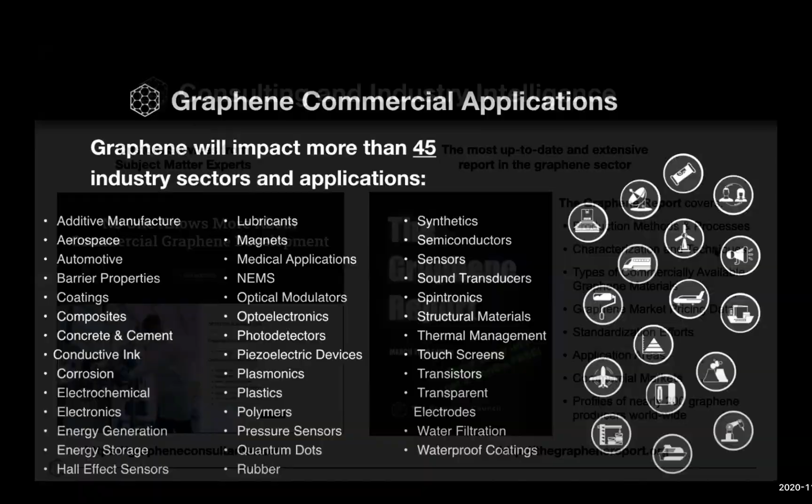One of the reasons graphene is such an exciting material is that it has so many potential applications, and we've identified more than 45 different ways that graphene can be used to dramatically improve the performance of other materials or applications. The Graphene Council is not only a trade and professional body, but we can also provide custom consulting and advisory services.

We are also the authors of the Graphene Report, a more than 600-page document that outlines production methods and processes, characterization techniques, forms of commercially available graphene materials, market pricing data, standardization information, different applications and commercial markets. We also profile more than 200 graphene producers worldwide.

The Graphene Council is the largest body for this sector, and we are a Tier 2 member of the Graphene Engineering and Innovation Center at the University of Manchester. We are incorporated in the UK, in the United States, in Switzerland, and have an office in Brazil with the MackGraphe Institute at Mackenzie University in Sao Paulo.

This is just one of a series of webinars that we are providing to help educate end users in particular about how to unleash the potential for graphene materials. We've also developed white papers on graphene use in aerospace and automotive applications as platforms.

We also have a collaborative project testing 15 different forms of graphene material head-to-head in a standard resin system to really evaluate how graphene can improve important mechanical properties and see which form of graphene, because there are many different types or morphologies of this nanomaterial, performs best in a resin system. They have independent third-party testing data that will be made available to the public, and that testing program is done in conjunction with the University of Manchester.

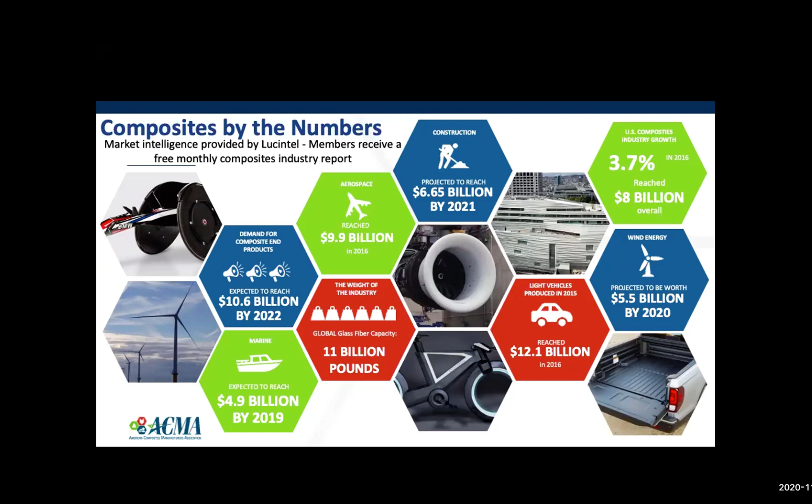I think I've already covered this, so I'm going to move on to some market development activities related to our Technology Day programs and OEM roundtables, where we connect our members to the latest and greatest needs within the end user community regarding composites.

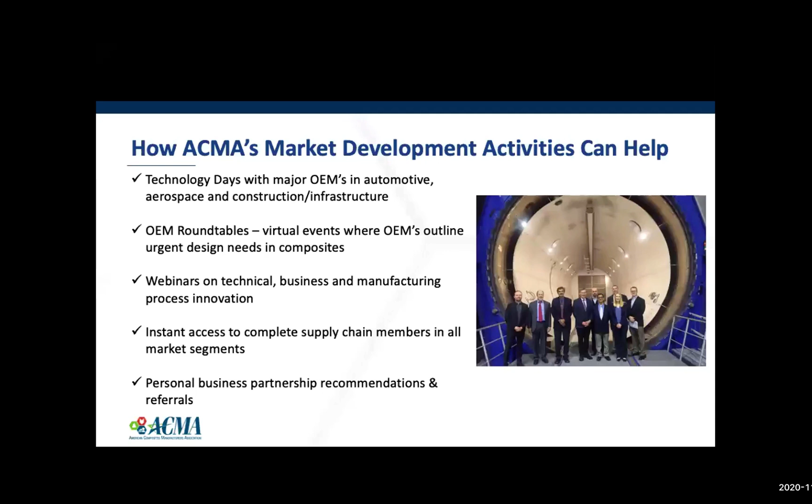And we have divisions in all the various market segments. As I said before, we represent everything from aerospace, architectural, through infrastructure, construction, even advanced air mobility, automotive, and high performance, which takes in aerospace, defense, wind, and compressed gases.

So our Technology Day programs, I'll just touch on this quickly, are private member-only events where we speak with one voice as an industry and help educate and bring the message of composites to the end users that are out there, many of whom did not get training in composites in their primary education. So we see education as one of our primary duties at ACMA.

And just sort of leaving you with some events you won't want to miss. You just missed our Spirit Aerosystems Tech Day, where we had 190 thought leaders from Spirit Aerosystems from around the world. Our VW Group Tech Days, I think there are still a few slots left. We'll be going from January to April in weekly meetings with folks from around Volkswagen Group.

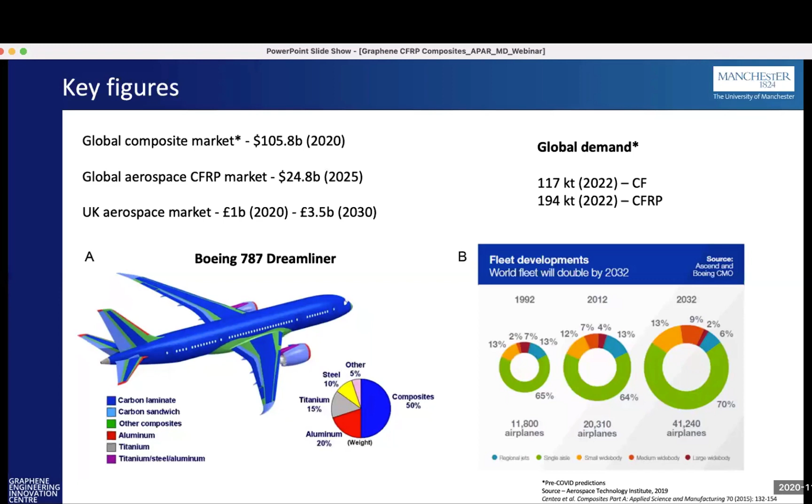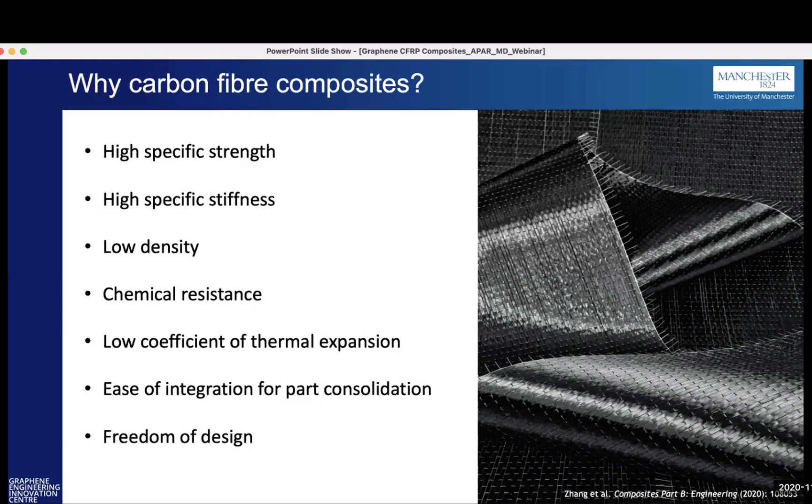So why carbon fiber composites? It lends itself to easy design, makes life easy for designing aircraft parts - high specific strength, high specific stiffness, low density, chemical resistance, low coefficient of expansion, ease of integration, part consolidation, and freedom of design. All of this lends itself to aerospace, automotive, and marine industries, making parts easier to design, more flexible, and lighter. Today, the push to reduce the amount of fuel used in aircraft and other industries is massive. So lightweighting of aircraft, cars, and marine vessels has been pushed heavily just to reduce fuel use.

Adding graphene to that - what makes graphene special? Graphene is 1/1,000,000th of the thickness of a human hair, but as a single layer it is the highest thermally conductive material known to man, and the highest electroconductive material known. It's chemically modifiable, so we can adapt it to whatever we want, whether that's chemical resistance or enhancing resin systems when put into carbon fiber prepreg. You can add it to resin systems a lot easier, with functionalization. It has high tensile strength - as a single layer it's 200 times stronger than steel. It has high surface area and is flexible, so we can make flexible components such as flexible batteries and screens. So it doesn't just lend itself to one new component - it's multifunctional, bringing that multifunctionality to a new component.

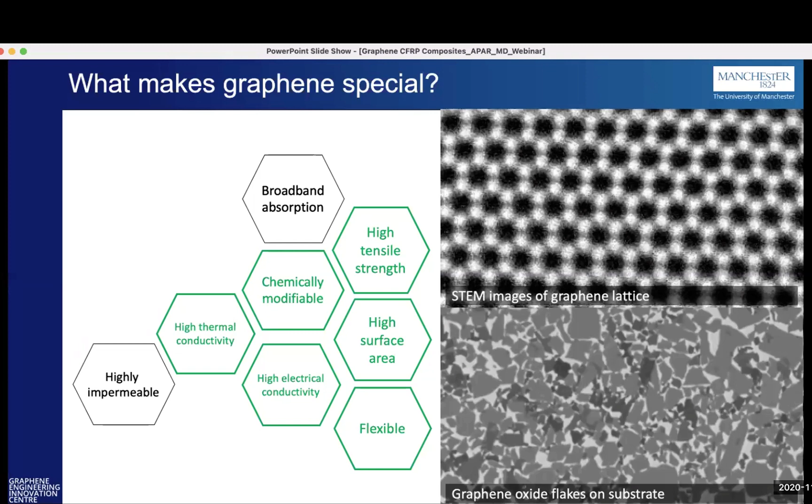So, existing and developmental commercial graphene carbon fiber reinforced plastic applications - some that we know of so far. The BAC car is a single-seat road car designed and built in Liverpool in the UK. These guys have developed a graphene-enhanced carbon fiber car which is actually in the market - I know for a fact they've sold all those cars to date. But they didn't just design new parts for the car; they actually started by designing new tooling to make the actual components, using graphene-enhanced prepregs for the tooling.

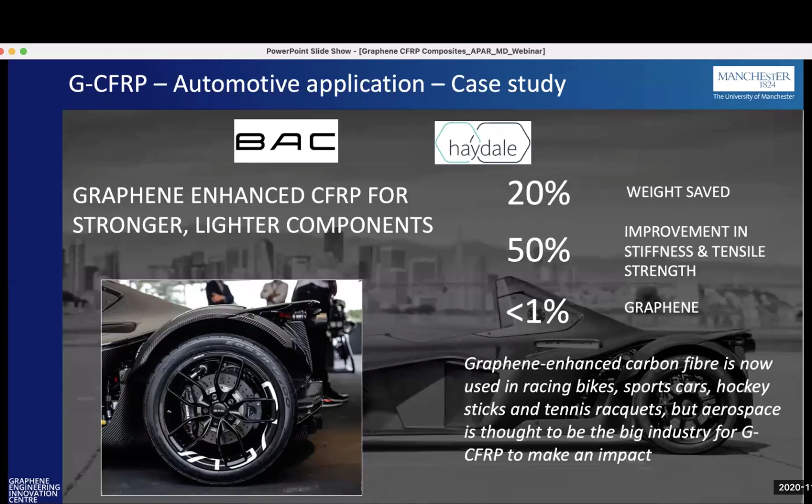This improved the thermal conductivity of the tooling, so they could process it quicker - it would heat up in the autoclave quicker, cool down quicker, and they could take parts out sooner, decreasing the actual process time required for manufacturing the car. They also designed new components - a component prepreg using less than 1% graphene in its resin system. The improvements for stiffness and tensile strength increased by approximately 50%, which allowed them to use less material in their parts, saving around 20% in total car weight. Considering the car itself only weighed 600 kilos to start with, that's quite a saving, and it also enables customers to drive around a track a lot quicker than normal.

For aerospace applications, one we've seen, which I'm sure most people have seen, is the Airbus A350 leading edge. This was part of the Wing of the Future project with Graphene Flagship, using a Hexflow RTM6 resin system with added graphene, put through an RTM process. They managed to increase the mechanical properties and also decrease the fracture speed of the component when in use. By increasing the mechanical properties, they were able to use less material, giving it a thinner edge. The actual component itself was a lot thinner, a lot lighter, and a better product altogether.

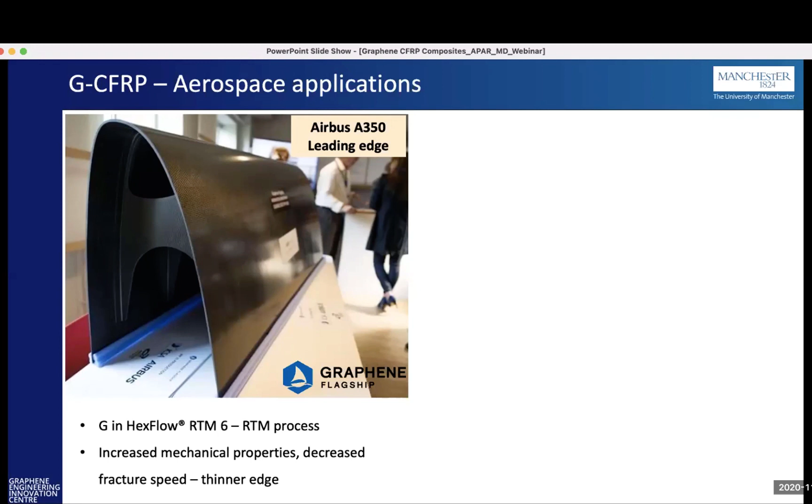So this is a UAV called Juno, which was developed by the University of Central Lancashire, along with Haydale and ourselves at Manchester University. As you can see, prepreg is used in the fuselage and the wings as well. If you look at the end of each wing, you'll see a blue sticker and a purple sticker - those are actually 3D printed plastic parts, the winglets, which are then bonded onto the carbon fiber wings themselves.

So it's covered multiple areas of where we can add graphene to different composites. And the next generation for the Juno will have a graphene enhanced battery. We've yet to decide what it's going to power, but it will be added to the next generation.

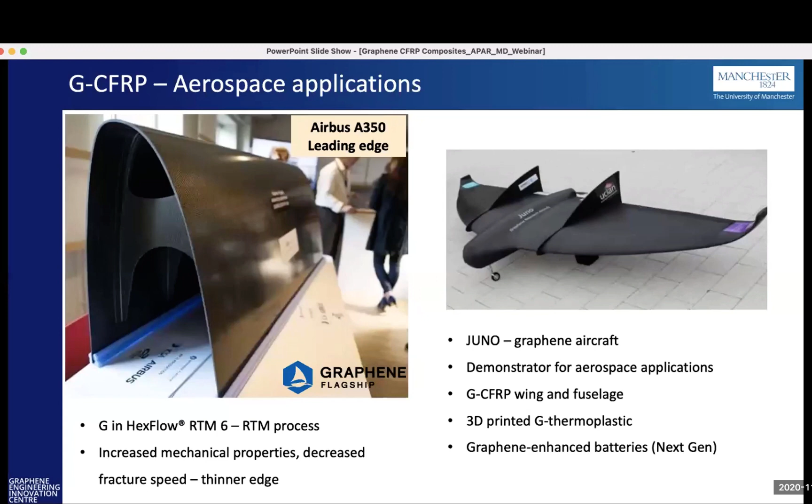So this is looking at thermal conductivity. Actually, this is an interesting one, for those in manufacturing of carbon fiber components. This, you can see, is a mandrel tool for a wing spar for an aircraft. It's 10 meters long. The customer had problems with microcracking in their tooling system, and tools were having to be replaced quite often. So it became very expensive for them to use carbon fiber tooling.

So what these guys did at Applied Graphene and Composite Tooling Engineering Solutions, Retrac and SHD, they developed a graphene enhanced prepreg, which was used just as a surface ply in areas where it was required. The graphene toughened the matrix, and that reduced the actual microcracking over repeated cycles, so it extended the tool's life cycle. In fact, I think that tool is still in service and hasn't had to be replaced as yet. So the costs have been driven down, and the customers using those tools now are very happy.

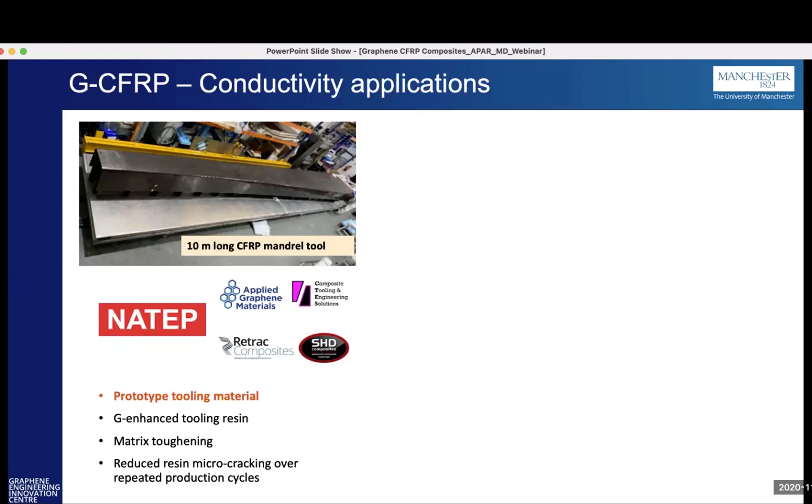So this is a lightning strike. Again, this is with a company called Haydale. So this was looking at trying to replace the copper wiring in the wings for lightning strike in aircraft - to increase electrical conductivity, a carbon fiber reinforced plastic with a graphene enhanced epoxy.

You can see on the left without the graphene, there are scorch marks, and with the graphene, there are no scorch marks whatsoever from the testing, so it didn't really touch it. But also, like I mentioned earlier about multifunctionality, they actually managed to increase the modulus in the material as well - by 16 to 20%.

And this material has actually been in an aircraft, a demonstrator, in 2017. So that was a very successful demonstration. And this material is now actually available in the market - you can actually buy this. It's commercially available.

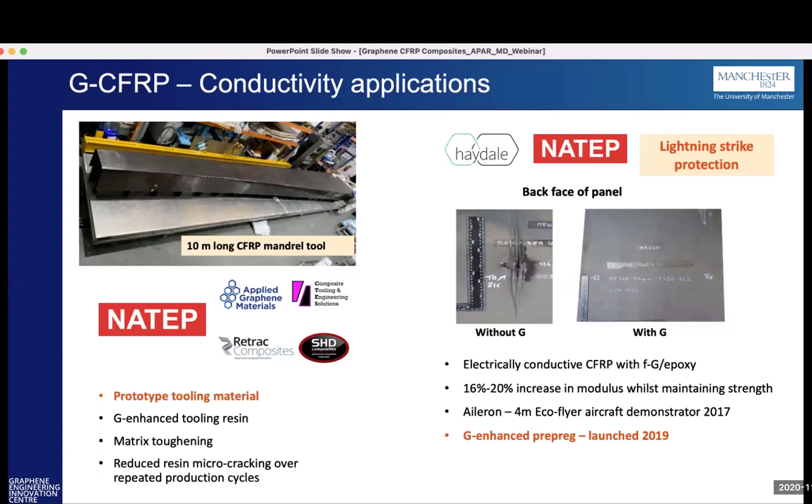So another area where graphene prepregs have been used is sporting goods. The gentleman, the athlete you see here, his name is Dom Parsons. He's a British Winter Olympian, and he won the bronze medal in the skeleton bob in 2018 on a graphene enhanced skeleton sled.

So what they found was that the improved toughness helped with the dampening of the vibrations from the actual run, through the runners into the athlete as well. So not only in toughness, but the dampening enabled Dom to be more comfortable on the sled. It stopped vibrations, so he could then control it better, and manage it a lot better.

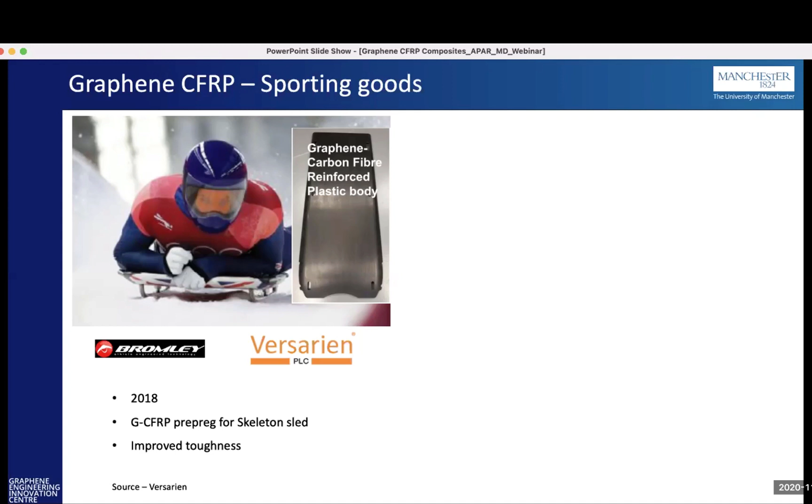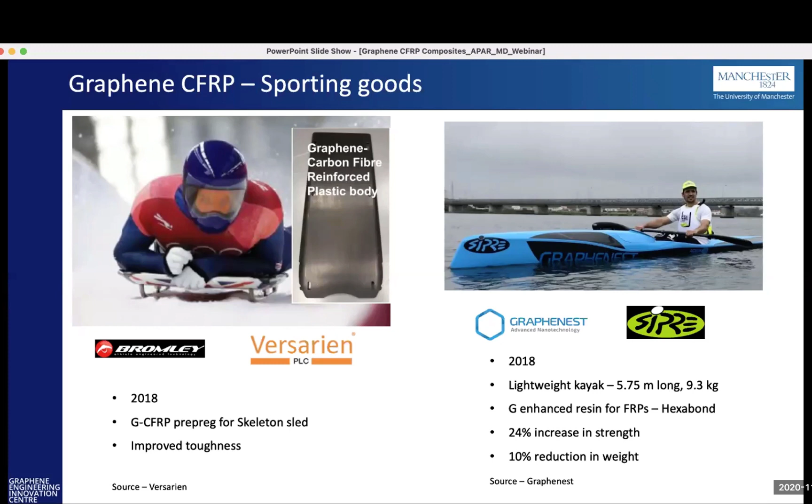So this, at the time we got this, was said to be the lightest kayak of its class in the world. I don't know how true that is anymore - I'd say it's back in 2018. But what these guys did, they added graphene to a resin system called Hexabond, and made a prepreg material with that. They found a 24% increase in strength, which enabled them to reduce the amount of material used, saving a total of 10% reduction in weight. Over something that size, a 10% reduction in weight is quite significant. So it's a really good test of graphene there.

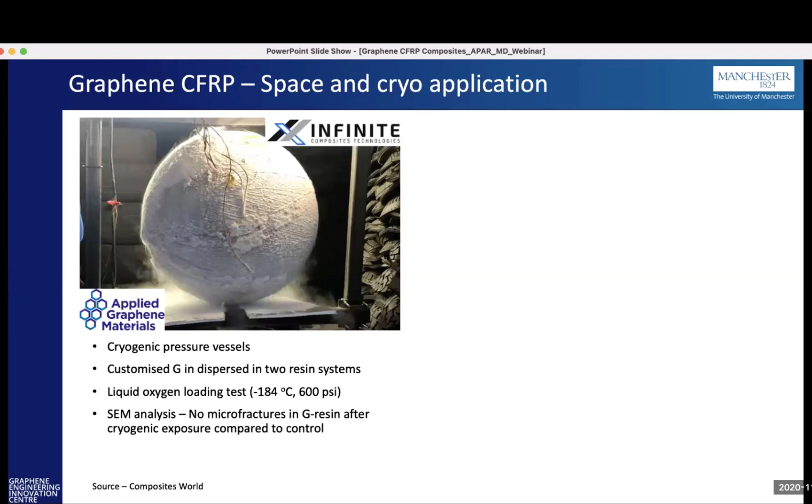So Orbex is a UK-based low-cost orbital launch service. These guys put commercial satellites into space for their customers.

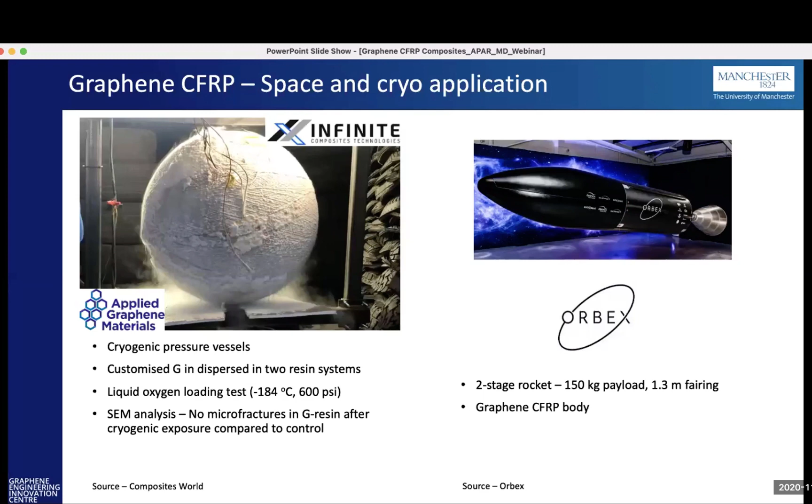They are looking at adding graphene to their carbon fiber body so they can reduce the weight. Hopefully when they reduce the weight of the actual rocket itself, they can then increase the amount of payload they can take up into space, or they can reduce the amount of fuel they require if they're keeping the weight the same. They can reduce the amount of fuel they're having to use to launch these rockets.

A couple of other products and developments which are out there in the market - I'm not sure people are aware of these - there's Dassi bikes, which was claimed to be the lightest bike on the market when it first came out. I'm not sure if you can still buy these bikes or not. Fishing rods.

Fishing rods are massive in the US. I know there's a company called G Rods in the US which have a number of fishing rods with graphene in their materials.

Bumpers for the automotive industry - this is a structural part for a bumper, and this was developed at the University of Sunderland, again under part of the graphene flagship. So that part is now going to the next stage and hopefully getting into industry.

We also have graphene enhanced prepregs. There's a number of different prepregs now which are available on the market. It's not only our partners that are selling those, but there are several materials out there available for people to buy off the shelf and use in their products.

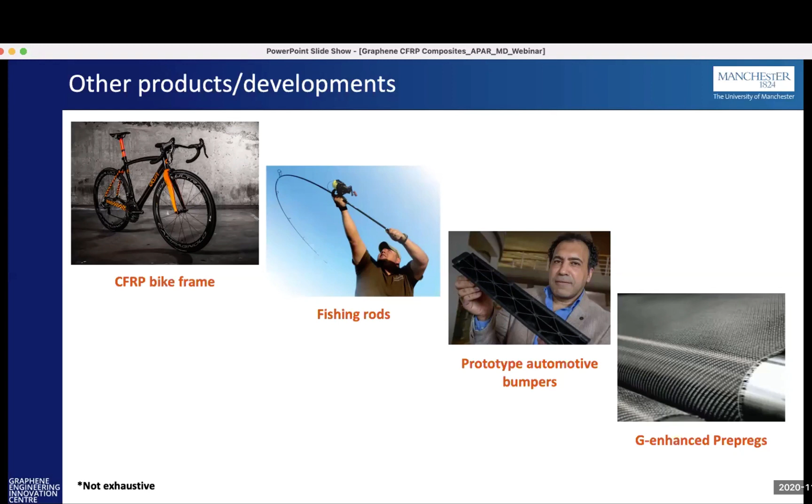That's a quick overview of where we're at with graphene and carbon fiber. I'm going to hand you over to my colleague, Dr. Aaron Raju, so he's going to go through the challenges in graphene adaptation.

Thanks, Terence. Firstly, I'd like to thank Terence for giving us the opportunity to be presenting in this forum. It's a great forum. So I'll start off with the challenges in graphene adaptation.

So the first one being, what are the common challenges existing in fiber reinforced plastics? The fiber and the matrix themselves are two different materials with completely dissimilar physical and interfacial properties. Because of these differences, they typically have a weak interface, and any defects present in the interfacial area can lead to sudden and catastrophic failures. Also, because of this property difference, these two materials have completely different thermal expansion coefficients, which could cause accelerated degradation.

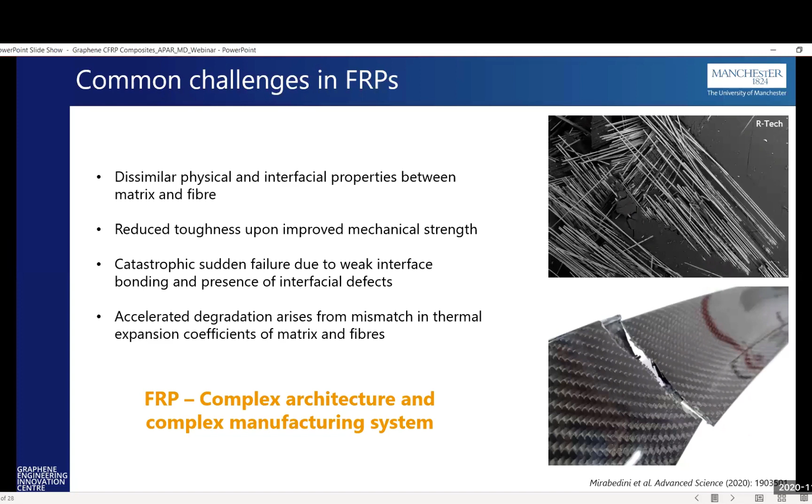So it's fair to say that the FRP is a complex architecture in itself, and the production methods to produce these composites are quite complex because of the parameters that are actually being considered.

So what are the commercial challenges when it comes to graphene? Firstly, the raw material itself - there are several different types of graphene, and compared to 10 years ago, there's a lot more graphene that you can actually count. There are several webinars happening within Graphene Council explaining the different types of graphene as well. So you have to choose the right type of graphene for the right application, and that's the most crucial part when it comes to designing any graphene for your application.

For example, graphene oxide is hydrophilic, so you could use it for water absorption, whereas graphene nanoplatelets are hydrophobic, so you'd use them for electrical conductivity and similar applications.

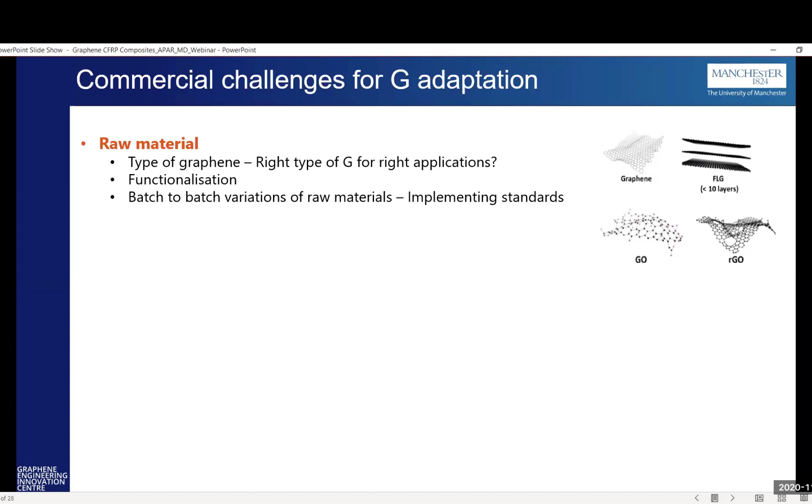When it comes to the actual raw material production, there is a lot of batch-to-batch variation, and the regulatory bodies are currently implementing standards to address that particular problem. It's fair to say that in recent years, raw material manufacturers themselves are putting in quite stringent quality regulations within the production of their materials, so we're not seeing as much batch-to-batch variation compared to several years before.

Of course, the second challenge is dispersion - how well the graphene is actually dispersed in the matrix form, and what are the best dispersion techniques to use. For example, do you have to use a high shear method or a low shear method, or do you have to implement any post-processing techniques in order to achieve dispersion in the final product.

Some may ask whether the resin transfer molding procedure could have a filtration problem, and there are techniques currently implemented to avoid this filtration of graphene nanoparticles. When it comes to material design, one of the data points lacking for end and prospective customers is data around operation scenarios or severe loading conditions.

There are plenty of literature and academic studies that say graphene is viable for certain applications. But when it comes to operational scenarios under severe loadings, the data is quite limited on how open companies are willing to share with end customers, and that's always the challenge.

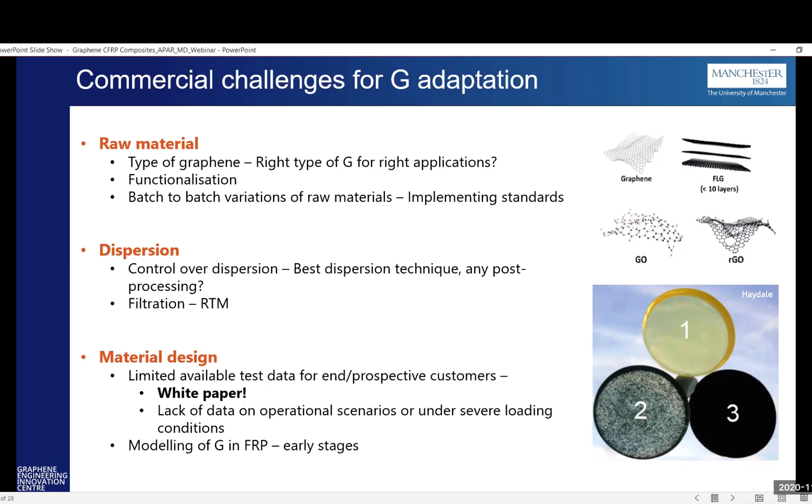Moving on to modeling. Typically, the modeling around graphene in fiber reinforced materials is still in the early stages. The research and development is going in the right direction in order to advance this particular field.

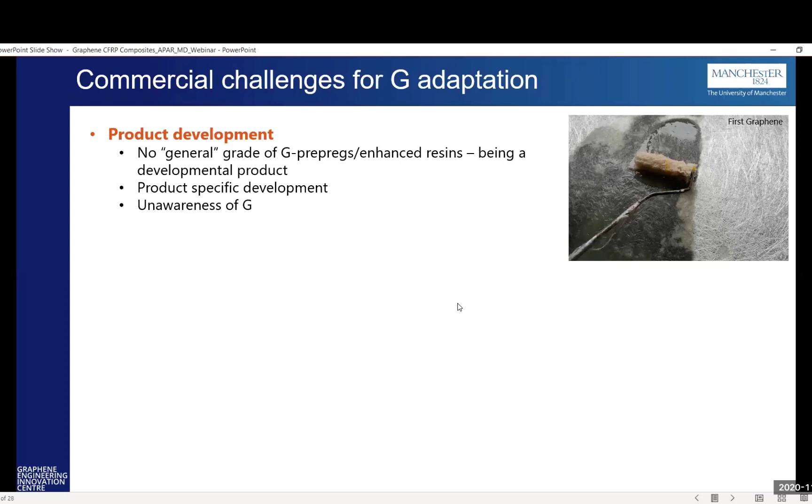The product development of graphene has always been specific for that particular application. So for people who don't have that sort of budget, it's hard for them to develop products without knowledge of graphene. Still, some companies or people are unaware of the presence of graphene, or what it can actually apply or impart to their products.

Complex resin formulation - as you all know, none of the resins as produced are used typically. They are either formulated with toughening materials or other fillers as well. So there is an interfacial interaction between graphene and these other fillers, which has to be considered when designing the material. This is one of the challenges of adapting graphene in commercial applications.

Putting cost in - for some people, cost is still a factor. To be honest, back in 2011 I bought 1 gram of graphene for 500 pounds, whereas now you can buy a decent grade of graphene for a kilogram under $200. Typically the loadings of graphene you want to add into fiber reinforced polymers are less than 1%, typically 0.5% in the resin, so you can go a long way.

Health and safety of the materials - how it can be handled, how it should be handled safely - is another issue.

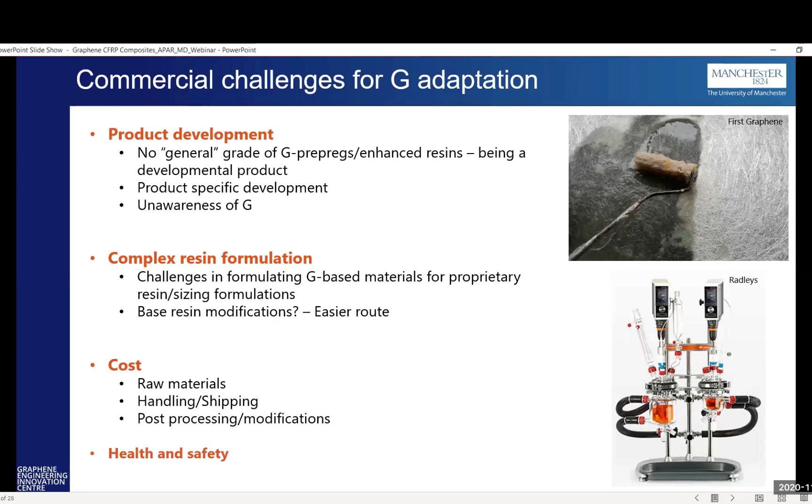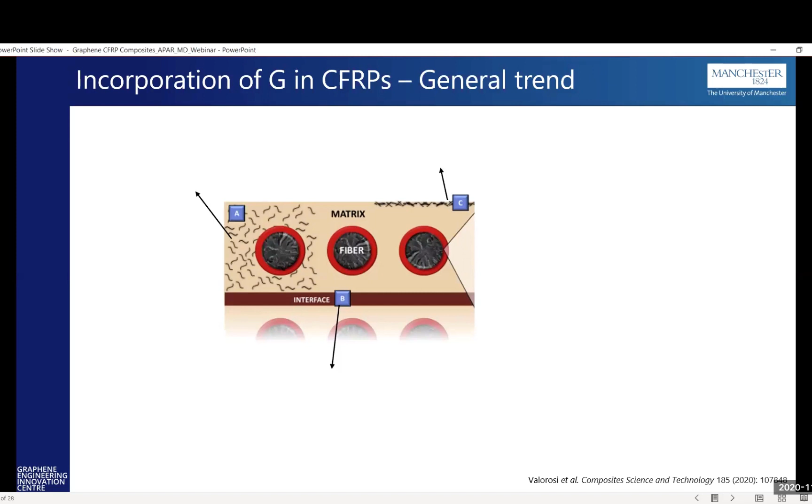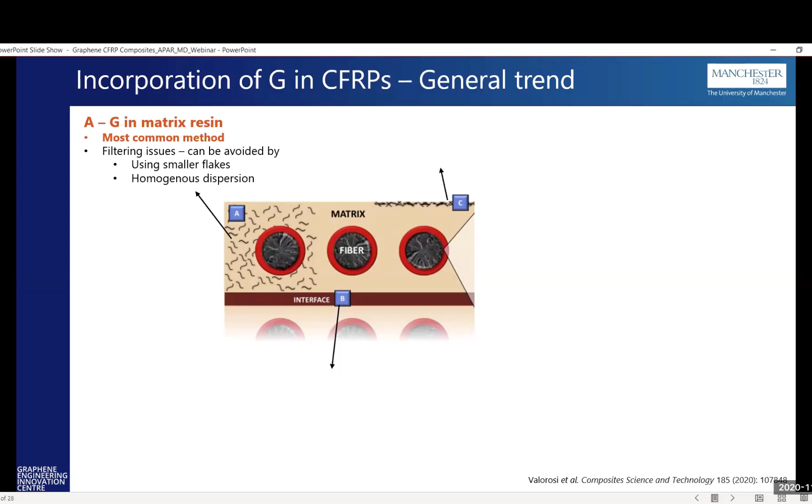So what are the opportunities of graphene carbon reinforced plastics? Just as a general trend, how is graphene added into CFRPs? The first one, of course, is modifying the bulk matrix, by adding graphene into the resin system itself. That's one of the most easiest ways. One of the challenges then is how do we actually keep it homogeneously dispersed.

The second method is by adding the graphene epoxy onto a film in between the plies, for example. Either you could apply graphene as a resin film, or it can be spray coated in between the dry fabric or on the pre-preg themselves, so that in the cured laminate, the graphene actually lies at the interface between two different plies.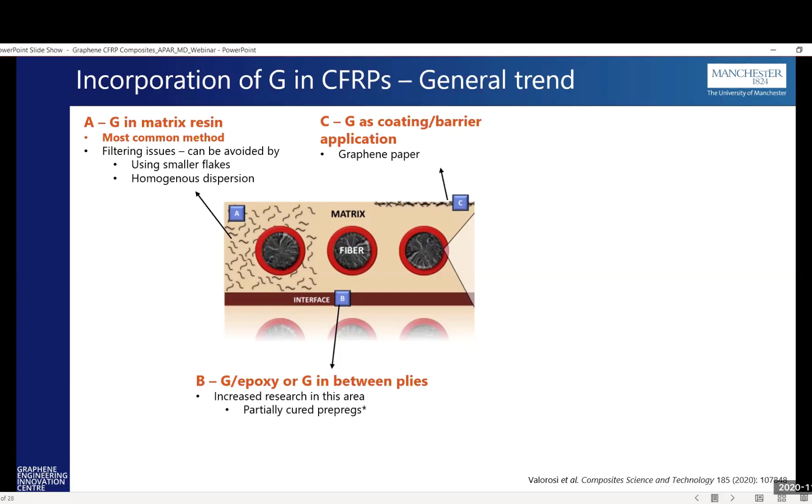The third method is graphene coated on top of the laminate directly, so it could act as a barrier application. Or the other method is to modify the surface of the carbon fiber themselves, either by grafting graphene or graphene-based materials directly covalently to the carbon fibers, or by modifying the actual sizing material by adding graphene or graphene oxide-based materials to it - which can act as the interface between the carbon fiber and the matrix.

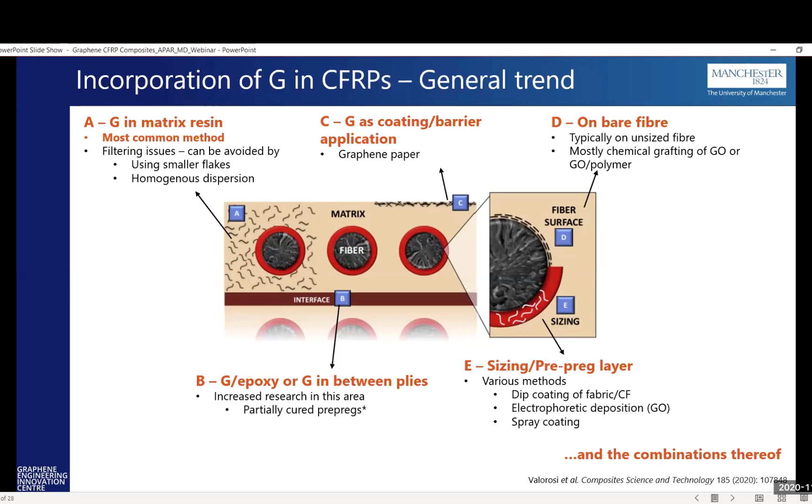Typically, combinations of these methods are quite variedly studied - that is, modifying the matrix and also modifying the surface of the carbon fibers seems to generally work well for FRPs.

This particular table I put in - the data has been generated from over 500 articles from these two different references. I highly recommend, if anyone is interested in graphene carbon fiber reinforced plastics, to go and refer these articles. We have done a comprehensive review of almost all the carbon fiber academic studies and also the commercial studies as well. As you can see, compression after impact is one of the crucial improvements that properties for aerospace and also automotive industry.

Improvements up to 25% seems to be a very crucial improvement, and it can be appealing for a lot of industries as well.

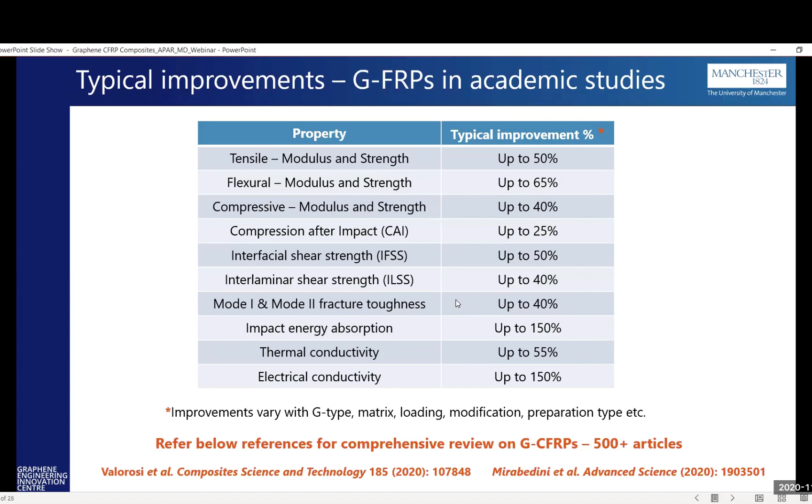I'm going to highlight a few properties that I feel are very important when it comes to carbon fiber plastics with the addition of graphene. One such property is the fatigue improvements.

Fatigue is nothing but progressive damage of material under repeated cyclic loading. It is when a material is deformed under the elastic deformation levels. Because of the nature of being deformed, there's a debonding that can happen between the matrix and the fiber or the reinforcement, which creates micro cracks. These micro cracks can eventually become macro cracks, and the crack can actually propagate, which eventually leads to the failure of the material.

Anything that can be done to delay the progression of a crack increases the durability of the material, and that's what graphene can help with. In this particular study, by adding just 0.3% of few-layer graphene to the resin, they were able to increase the fatigue life of the material by nearly 15 times.

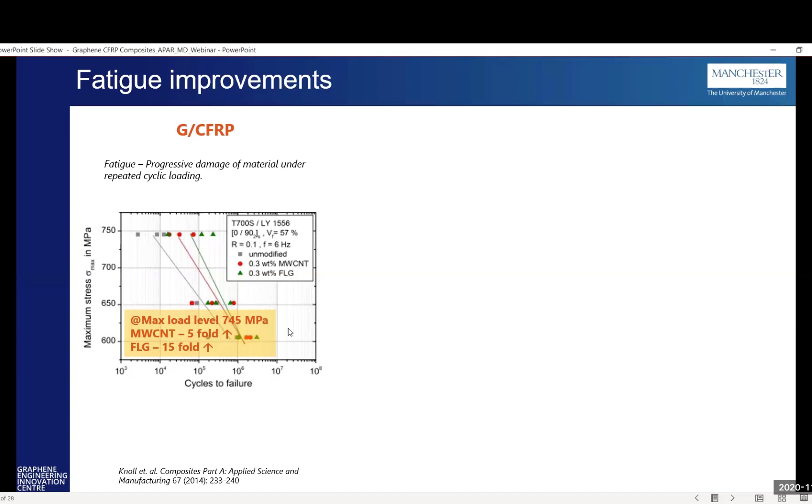When you compare it with multi-wall carbon nanotubes, they were only able to achieve a 5 times increase. This can be explained in this study where graphene is used in just an epoxy itself. This is a neat study in which they've distributed the graphene in the resin using different dispersion techniques, and applied electric current to see if they could align the graphene in the direction of the current. As you can see, they actually achieved it, and these samples went through fatigue testing.

In the neat resin, if you look at the crack propagation, there's nothing in front of the crack to prevent it from going through, so it eventually fails. Whereas with randomly oriented graphene, because of fatigue deformation, there's a stress concentration between the graphene and the matrix which creates debonding and micro cracks. Because of these micro cracks, the crack propagates into them, causing crack deflection. Because of the crack deflection, it's absorbing more energy, and because of absorbing more energy, you're increasing the fatigue life of the material.

It's the same thing with aligned graphene. The only difference is when the crack comes in contact with the graphene which is aligned vertically, the crack has to propagate even longer, or go over the graphene nanoplatelets, which means it's absorbing more energy, thereby increasing the fatigue life.

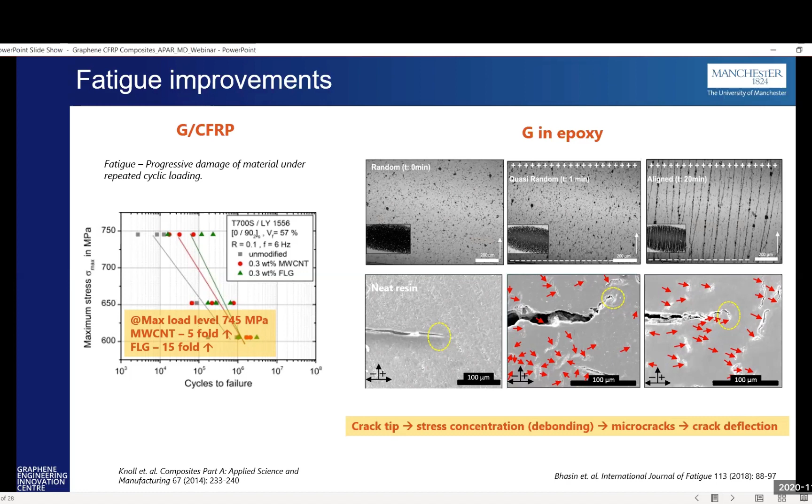Moving on to fracture improvements - you may have seen, back in 2017, McLaren along with the University of Manchester collaborated to produce this beautiful piece of engineering: the first graphene watch. The whole watch weighs just 40 grams, including the strap and all the components inside, thanks to the frame made with graphene-enhanced carbon fiber plastics.

The graphene was added into the resin, which was then made into prepregs, and then made into laminates and sheets, which were then machined to form the actual casing itself. So what has graphene done, you may ask? What you can see here on top is...

A computed tomography, X-ray tomography picture. You can see these are the graphene flakes, and these are typically large in dimension, probably 10 microns or larger. What they found is they seem to align in the direction of the UD fabric on top, maybe because of the filtration effect.

Interestingly, when they did the cross-section analysis, they were able to identify smaller graphene flakes, sub-2 micron or 5 microns, embedded between the carbon fibers and reinforcing the matrix themselves. Because of the combination of these, they were able to see improvements in the axial properties, which is predominantly dominated by the carbon fibers themselves - quite interesting.

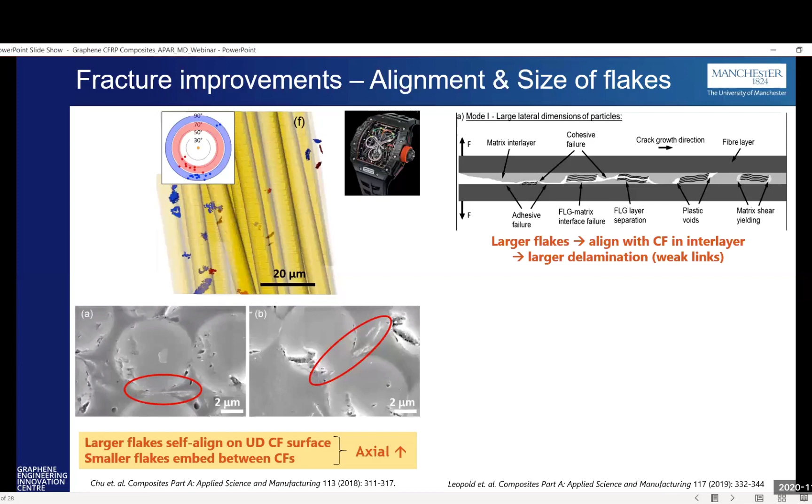But with smaller flakes, they can align in any direction, in a 3-dimensional way. So when a crack propagates, it has to go through a lot of routes - these small flakes can act like obstacles for these cracks. So the take-home message is that smaller dimension flakes work very well for carbon fiber reinforced plastics, rather than the larger flakes, which are typically the case for rubber and plastic based materials.

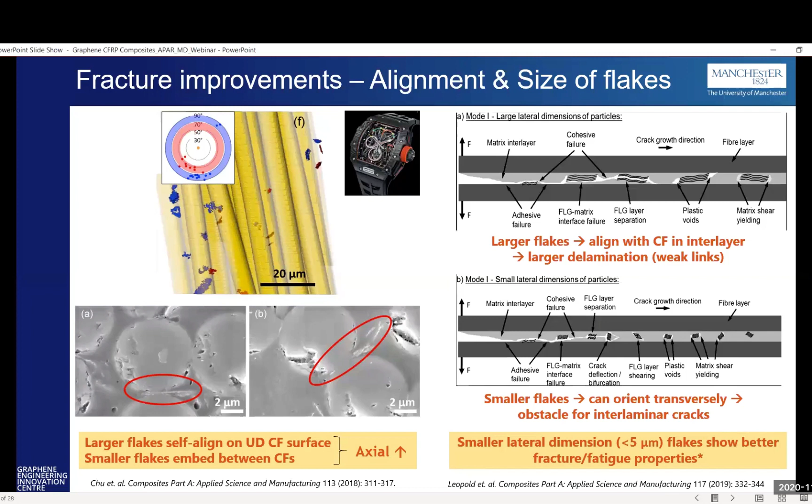So moving on to the multifunctional applications of graphene - other applications include de-icing by Joule heating, or resistance-based heating. In one of the studies, they produced graphene in a polyvinyl alcohol-based material, which was then coated onto paper, and they made a paper heater.

And they claimed that by heating it with high density power, this heater is very efficient, such that they heated up from minus 32 degrees to 0 degrees in under 2 minutes. One important observation was it worked comparatively very well to conventional silicon wire based heaters, performing much better. Theoretically, they aim to melt 1 millimeter thick ice from minus 32 in under 9 minutes.

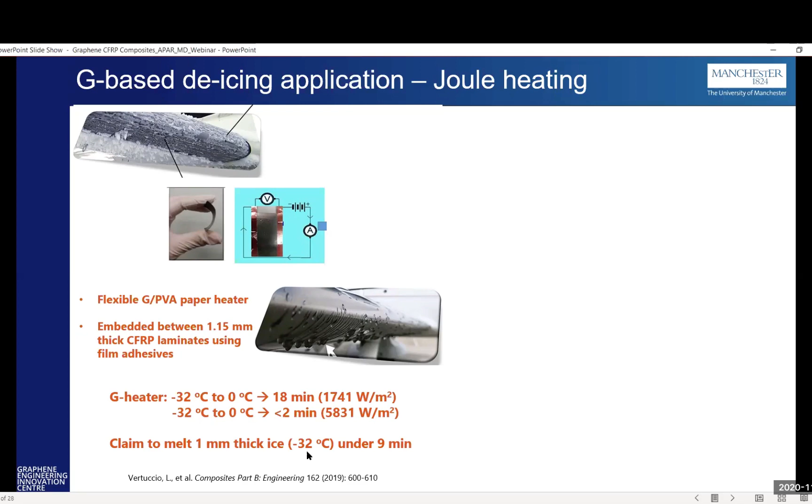This particular study was done on a glass fiber reinforced plastic, but it's still very relevant because you can see the methodology behind it. Individual glass fiber rovings were coated with graphene-based inks, which were highly conductive on the surface, and they used that surface conductivity to heat up and work as a heater. This heater performs from minus 0.1 degrees to 27 degrees C in under 5 minutes. So you can see the multifunctional gains you can obtain apart from just adding graphene for reinforcement - you can apply it to other application development as well.

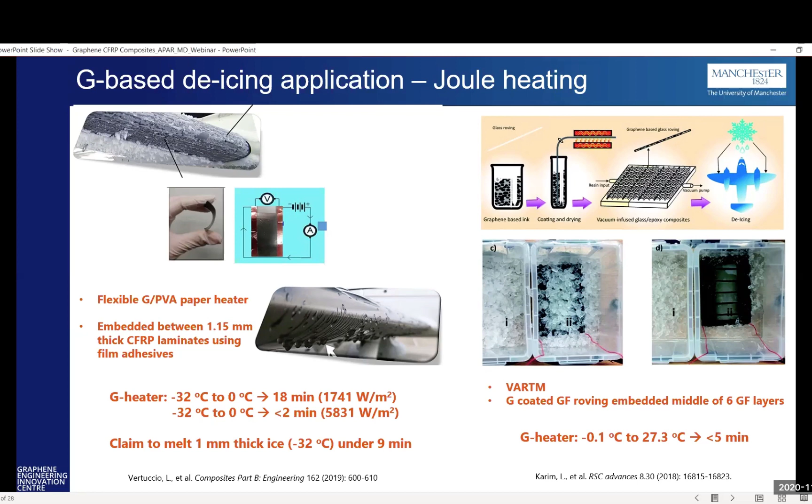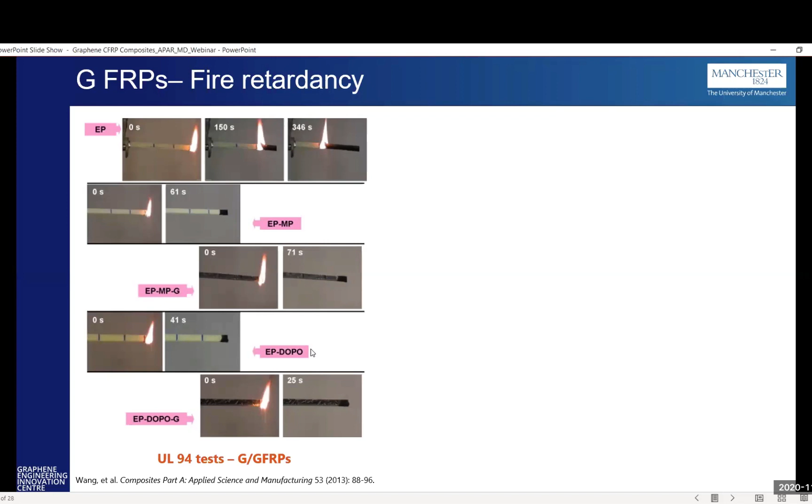Fire retardancy is another area where graphene has seen a lot of improvements. By adding graphene along with other existing fire retardants, we've seen very good improvements in fire retardancy. For example, DOPO is a non-halogenated fire retardant being used, and by adding graphene to the DOPO, they were able to improve the entire composite's UL94 properties.

In another study, they chemically grafted the DOPO onto graphene oxide, which was then used to produce CFRPs, and with just 3% loading, they were able to increase the limiting oxygen index from 18 to 28%. You don't necessarily have to add graphene to the whole system.

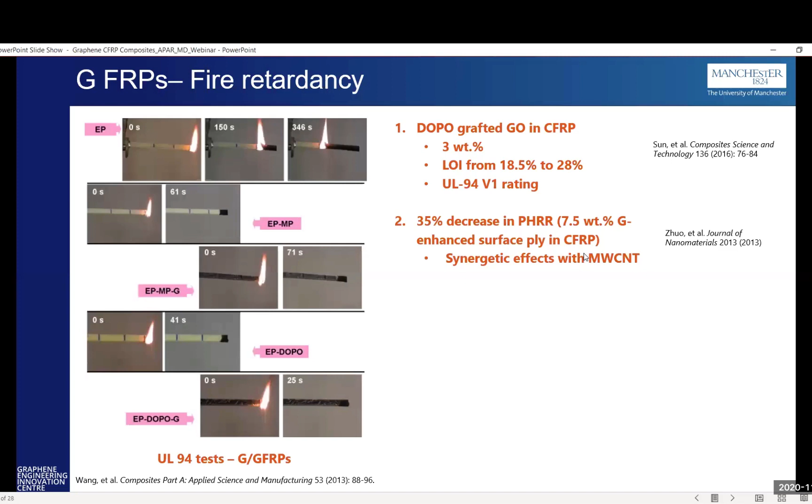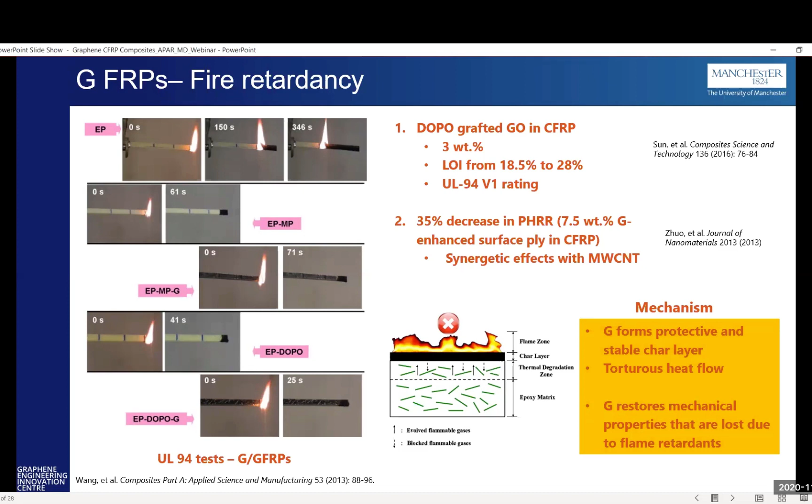In another study, they only added graphene on the surface layer, surface ply, and still they were able to decrease the heat release rate by 35%. The way it works for fire retardancy is that graphene forms a protective char layer when exposed to fire, and this char layer prevents heat from penetrating through the material, increasing the tortuosity for heat to go through. Besides that, graphene can restore the mechanical properties typically lost because of the flame retardants being used.

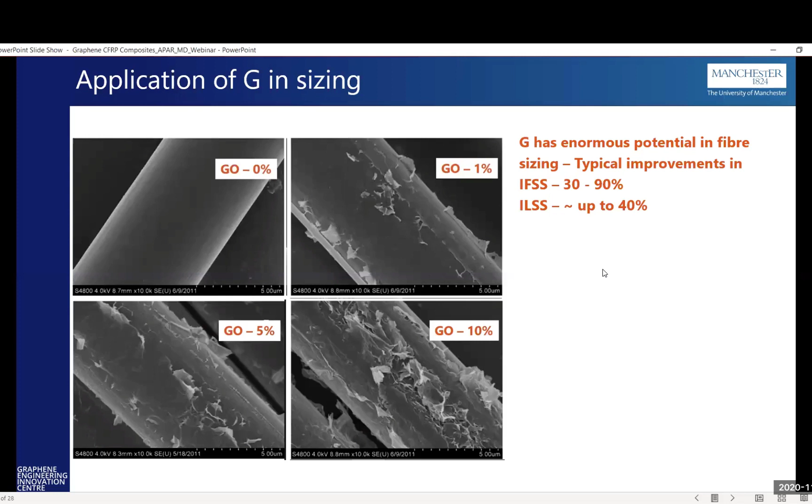Another area is graphene used in the actual sizing itself. Graphene has enormous potential in the sizing industry, and typical improvements you can get are up to 40% on interlaminar shear strength. It's quite compelling for a lot of industries, with the advantage that it could actually disrupt the market.

In recent developments, sizing formulations are typically water-based, so graphene oxide-based sizing material seems to be widely studied, and it's very stable as well. One note we got from the sizing industry is that the actual sizing for commercial application doesn't need to stay stable for a long period of time - a 72-hour stability is more than enough, because that is the time it takes for the sizing to be produced and applied onto, for example, glass fiber. So if the graphene-based formulation is stable for 3 days, that could be enough.

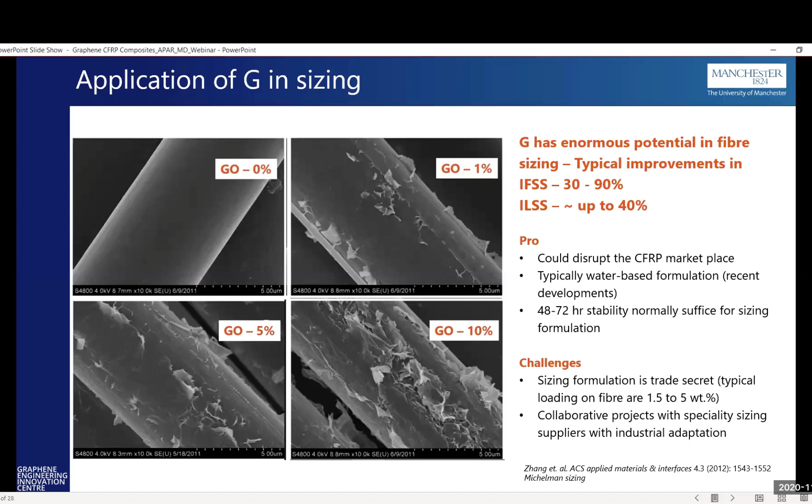The challenge is the sizing market, as you know, is highly trade secret. So you'd have to find a sizing formulator, or work with carbon fiber manufacturers themselves to work on this particular industry.

Another interesting application area which has seen a lot of press recently is a very interesting piece of science developed earlier this year. By adding graphene to the carbon fiber precursor, polyacrylonitrile, you can actually improve the properties of the carbon fiber itself. This study showed that adding just 0.075% of graphene increased the strength and modulus by quite a way.

The way it does this is that during the actual drawing procedure, the graphene aligns in the direction of the drawing. It helps alter the microstructure, which means the whole carbon fiber becomes more compact, producing very good mechanical properties.

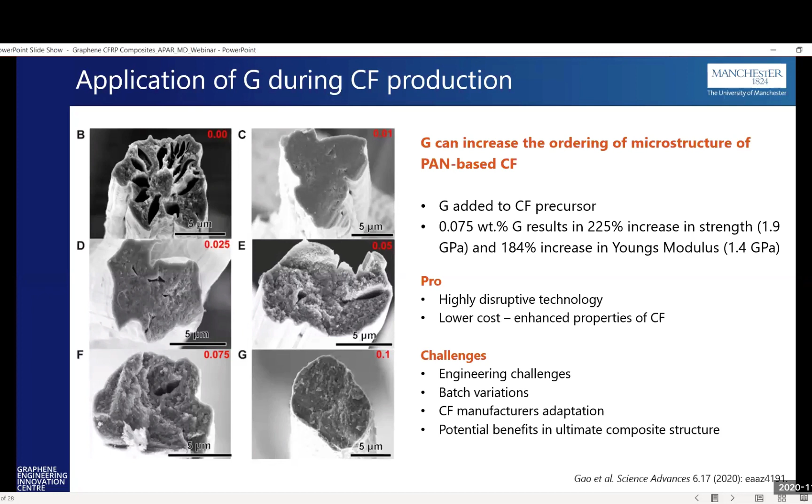Of course, the challenges being how it can actually be adapted into the industry itself, and how well it handles batch-to-batch variations. This is an initial study, but it still shows quite a lot of applications that can develop.

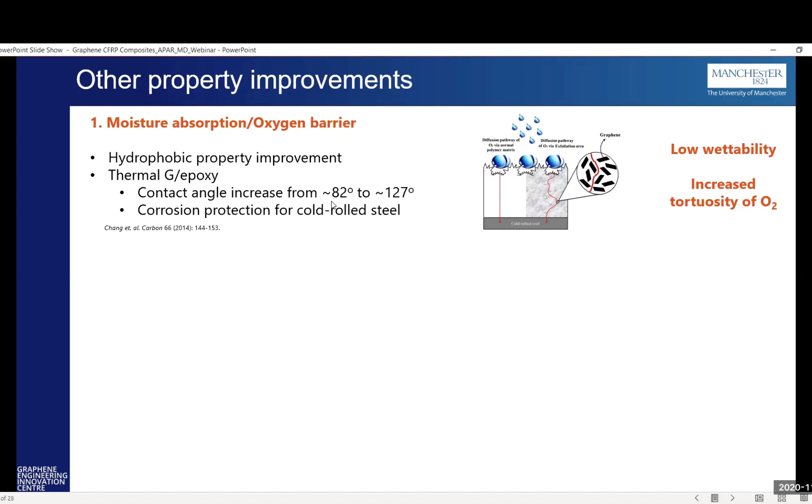So other property improvements I'll quickly touch upon, as I mentioned, the moisture barrier. One type of material, graphene oxide or reduced graphene oxide, has hydrophobic properties you could tap into to produce a hydrophobic material. In one study, they showed improvement from 82 to 127 degrees in the contact angle, using this material as corrosion protection for a cold rolled steel application.

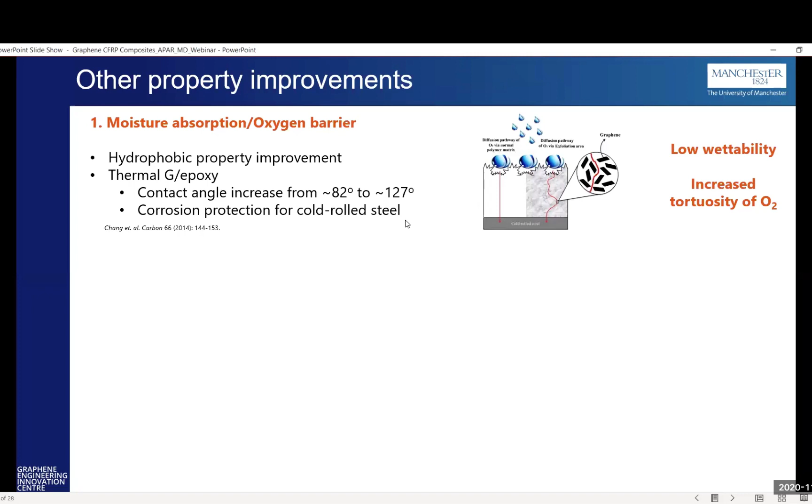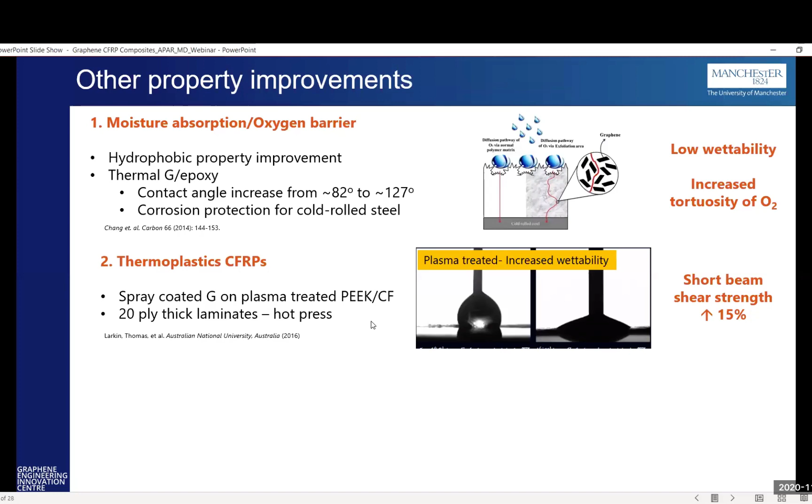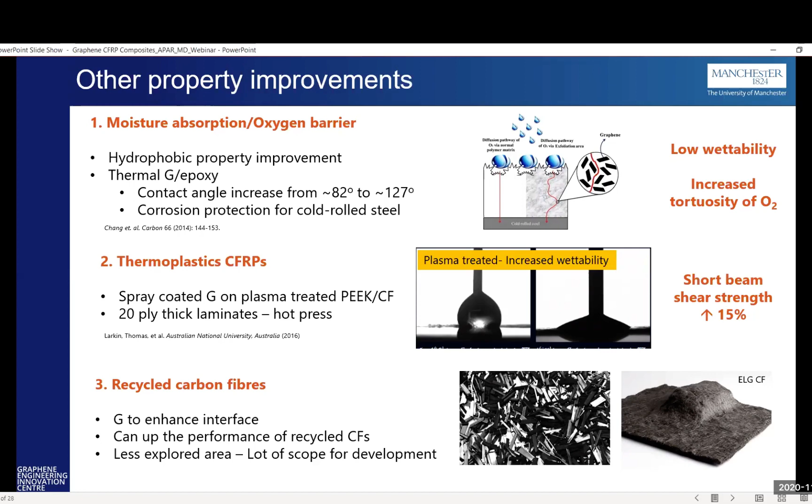Recycled carbon fibers is another area, and interestingly it's one of the least explored areas, with a lot of scope for development for either carbon fiber manufacturers, recycled carbon fiber manufacturers, or graphene product manufacturers to find an application. Recycled carbon fibers are currently being used in so many different applications, even being made into fibers, so perhaps graphene can enhance the adhesion or improve the performance of the recycled carbon fibers as well.

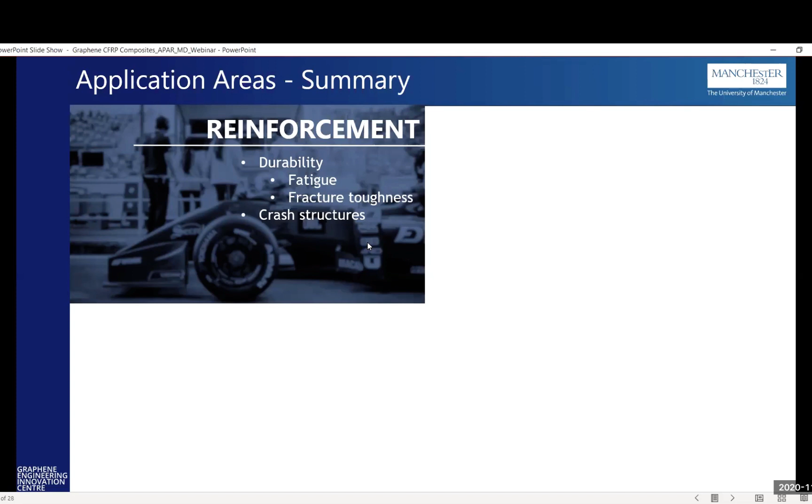So in summary, for the reinforcements, graphene increases the fatigue and fracture toughness of the material, which further increases durability, which can be used in crash structures, for example. Lightweighting is huge—anything to do with reducing the weight of the product, for example in wind turbine or automotive industries, which carry a lot of weight.

Conductivity, both thermal and electrical, plays an important role when it comes to graphene-based materials. You've seen commercial applications where graphene is being used or tested as lightning strike protection. Often graphene-based heaters are being developed for de-icing applications, and there is a big spearhead within the graphene flagship concentrating on this particular application. Multifunctionality is another additional benefit—apart from the mechanical improvements and lightweighting, you're also looking to improve flame retardancy and hydrophobicity of the entire composite.

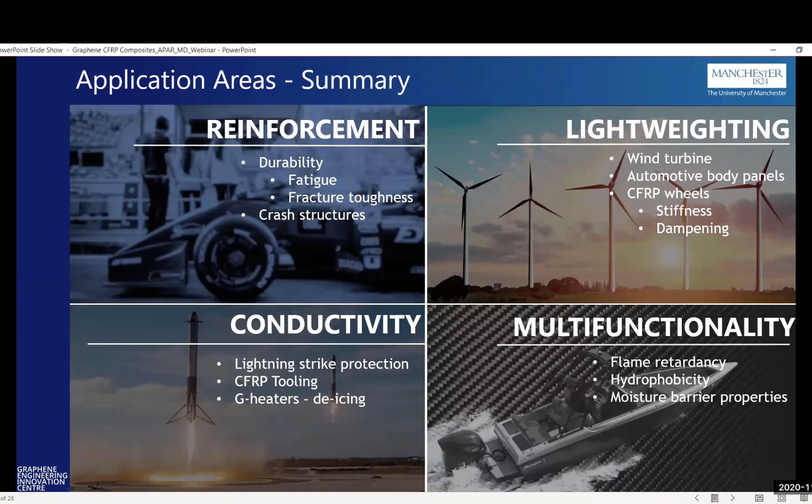So I think with that, I would like to thank everybody for being in this forum.